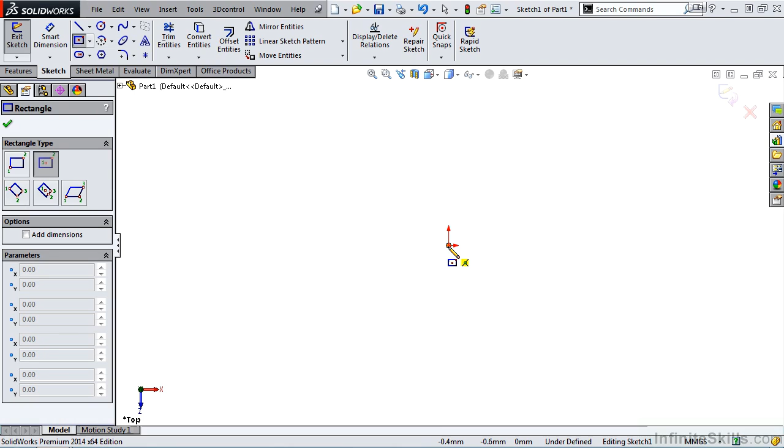So let's begin. You want to start by creating a new part file, which I already did. And then you want to create an extruded base on which to design this forming tool. So I am going to select extruded boss base and then the top plane. Now the shape and size of this base is not important, so I will select center point rectangle, stretch it out, no smart dimensions are needed, close out of the sketch.

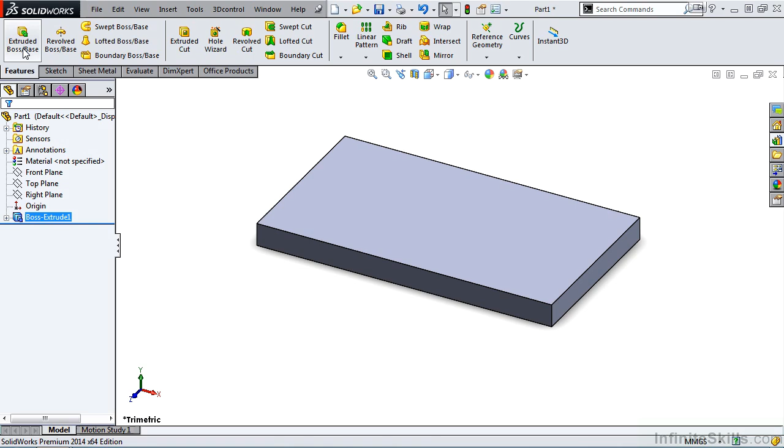A thickness of 10 is fine. Again, the thickness is not critical. We are just looking for a base. Close out of the boss extrude command. Now I am ready to begin designing my forming tool. I am once again going to select extruded boss base and begin my sketch on the front plane. I will view normal to the front plane and then start sketching.

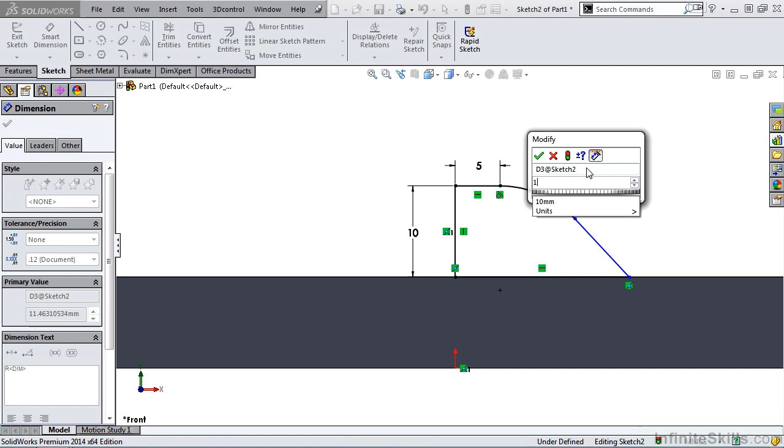We'll put a large radius, extend it down, and then back to the starting point. Next, we'll add some smart dimensions so we can get this fully defined. We'll set this to a height of 10, this horizontal leg to 5, the radius to 10, and this leg here, 10. And you see the sketch is fully defined, so we can close out of the sketch.

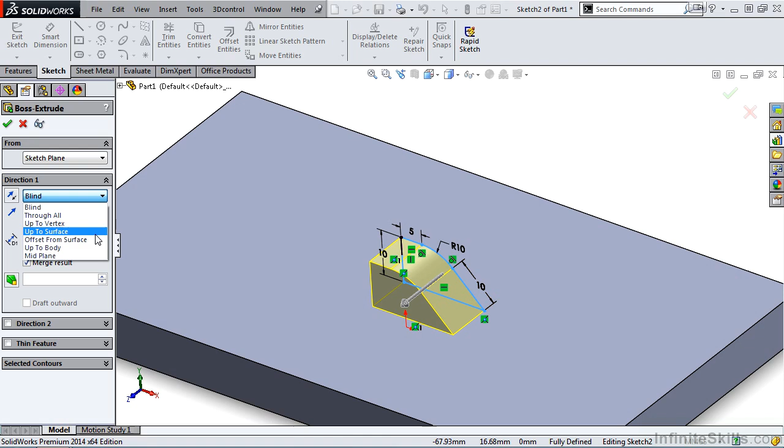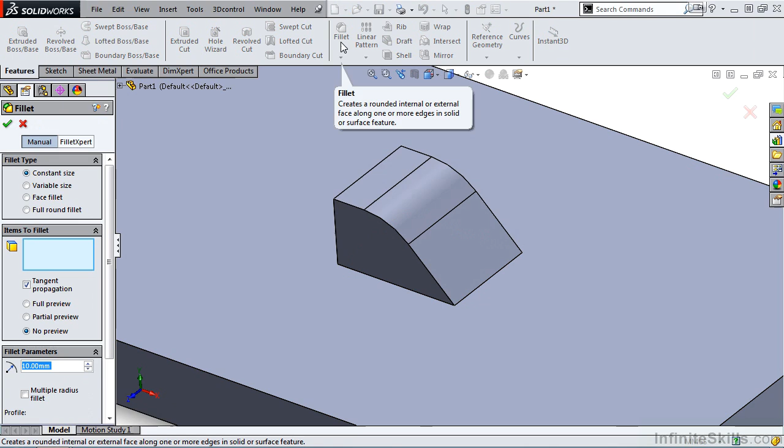We are then returned to the property manager for the extrude command, and I want to extrude this about the midplane for a distance of 15 millimeters. I will close out of the boss extrude command, and I am almost finished. But first, I must add a fillet to this edge here, because if you were to lance this into a sheet metal part, the sheet metal part will not like this sharp edge. So I will select the fillet command, select this edge, and then input a radius.

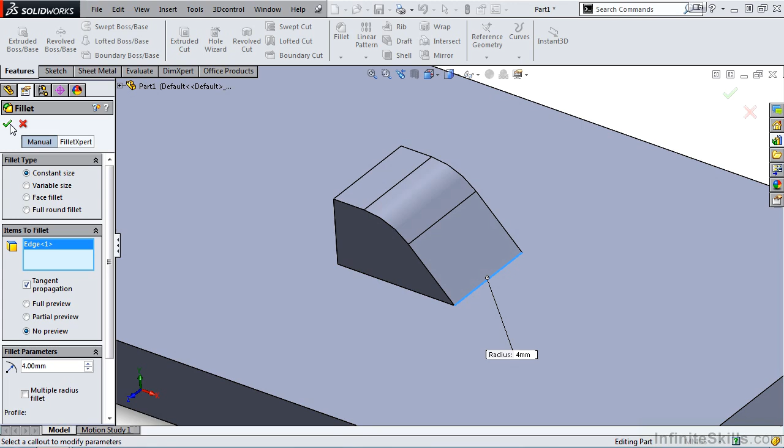Now it's important to note that the radius must be no smaller than the thickness of the part in which you will be using this forming tool. My sheet metal part that I will be placing this in is 18 gauge, or 1.5 millimeters, so this radius must be at least 1.5 millimeters. I am going to type 4. Close out of the fillet command, and there's my fillet.

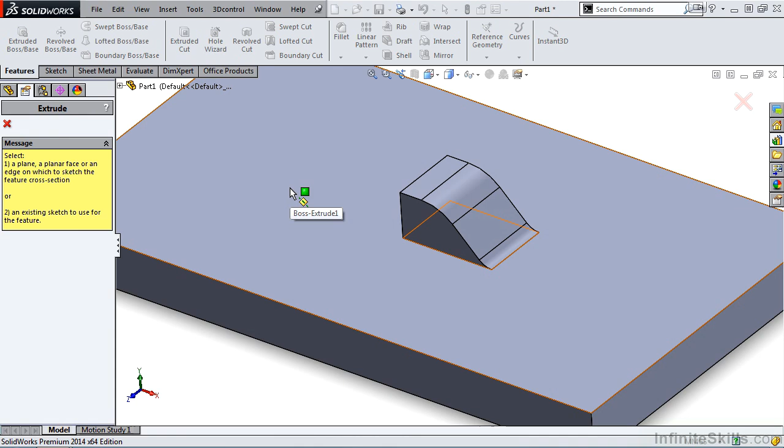Now the last step is to remove this base. While it's not necessary to remove the base, it does help you in visualizing your forming tool. The easiest way to remove this base is to go into the extrude cut feature, select this top face as your sketch plane, convert entities of this top face, and then close out of the sketch. And for direction, you want to select through all. Click the green check mark, and the base is gone. There's our new forming tool.

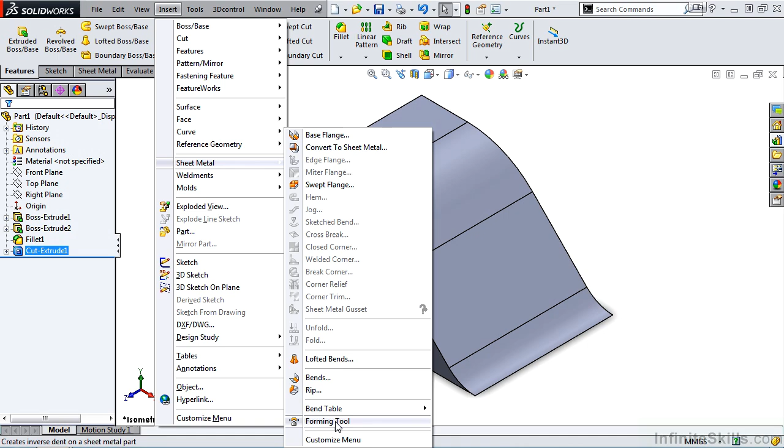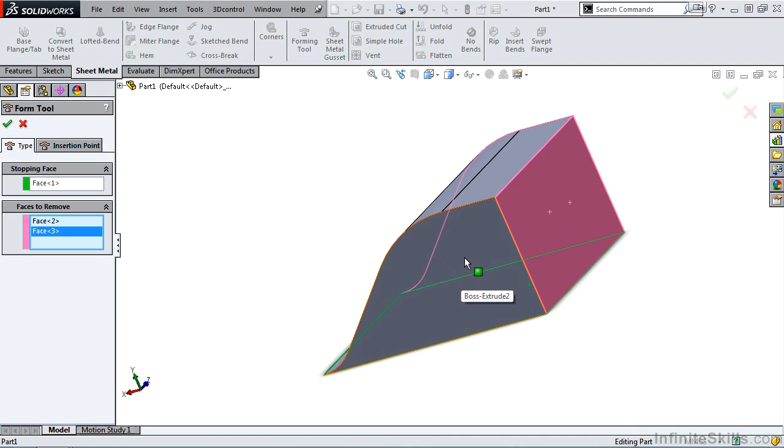Now, just like we did in an earlier lesson, we have to define the forming tool. In an earlier lesson, we selected Insert, Sheet Metal, Forming Tool, or you can go to the Sheet Metal tab in the ribbon and select Forming Tool. I am going to select the bottom face of this part as my stopping face, and then select the 3 vertical planar faces as my faces to remove. I am going to close out of the forming tool, and notice all of my colors are correct. Cyan is the stopping face, red are the faces to be removed, and yellow are the faces that we are keeping.

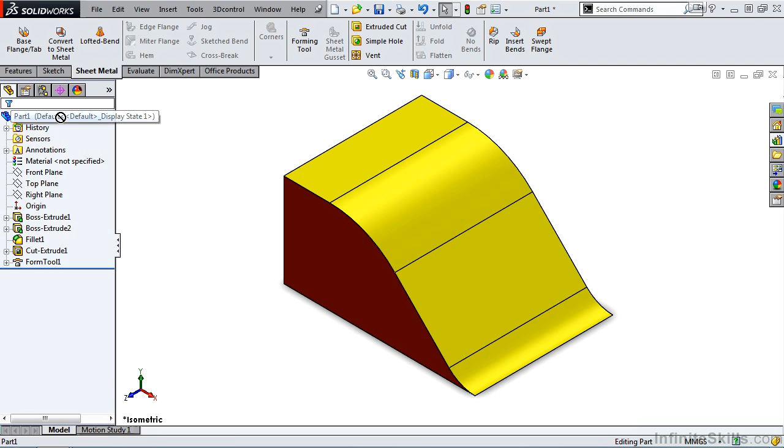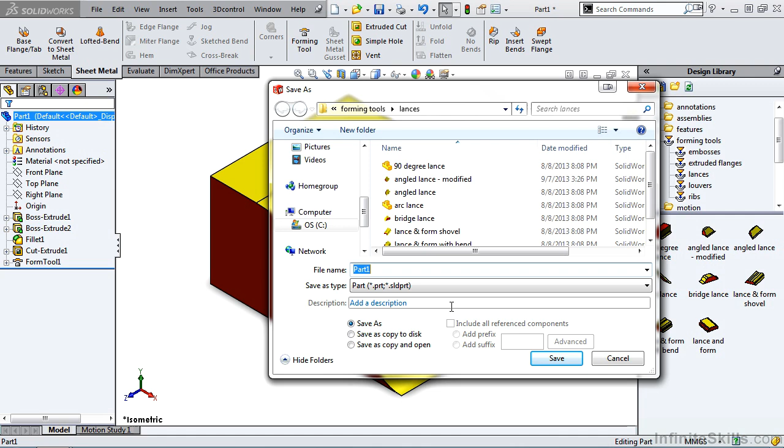Now the last step is to save this as a forming tool. The easiest way is to open up the design library, go into the appropriate folder and simply drag it from the feature manager tree. And notice my task pane closed. What I should have done when I opened the design library is to pin it open. So let's go back and redo this. I will drag part 1 over to this window, and I am prompted for a new forming tool name. We will call this Radial Lance. Select Save, and it's added to the window.

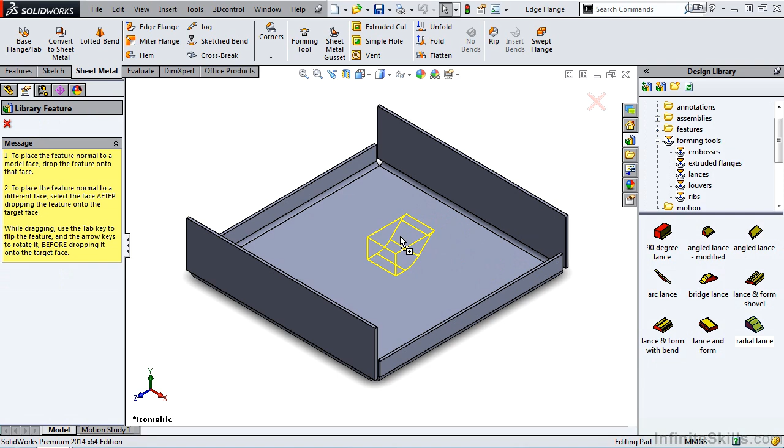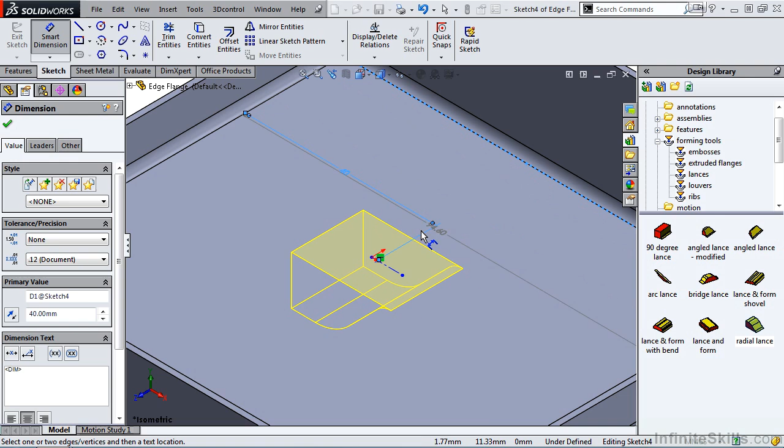Now, let's see if this works. Let's go into a part we used in an earlier lesson called Edge Flange, which can be found in your Working Files folder, and add this Radial Lance. I'll place it on this face. Let's go ahead and rotate it. There we go. We can position it. I'll add a couple smart dimensions. We'll set this to 40. And from this edge, we will set this to 35.

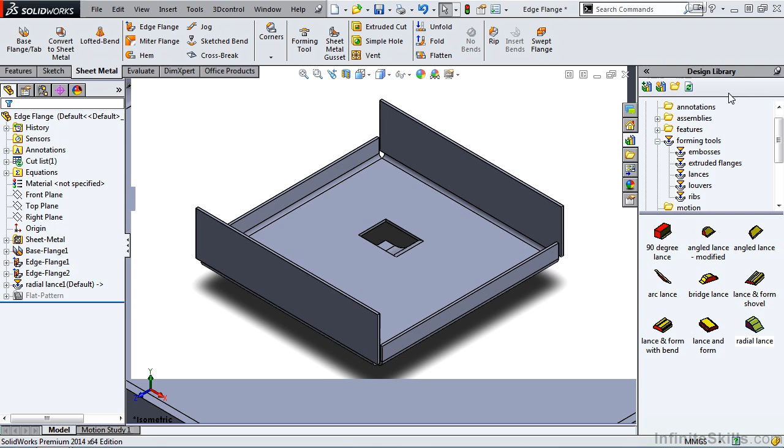Close out of the dimension, close out of the Forming Tool Property Manager, and the lance is placed in the sheet metal part. Now I'm going to go back to an isometric view, close out of the design library, and let's roll the part so you can see what we produced. And there is our new lance in the sheet metal part. And this concludes our lesson on creating new sheet metal forming tools.